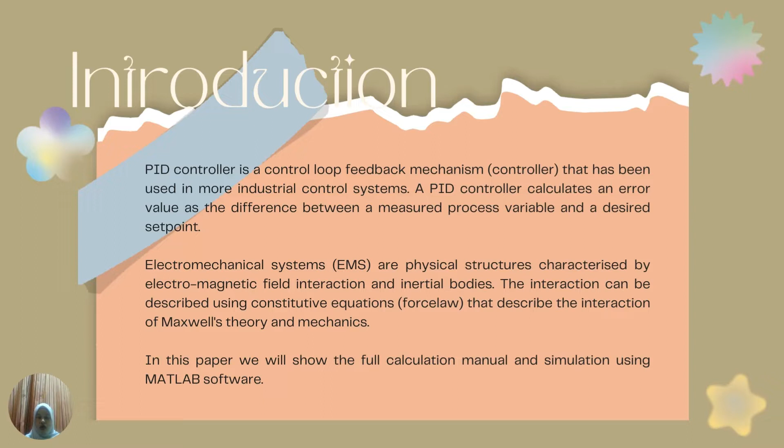Now I will be presenting the literature review part of this project. So in this chapter, we will focus on conducting a literature review for each project element. So based on the findings during the project completion, each element will be discussed in detail.

So firstly, an electromechanical system such as a DC motor gives greater speed control performance and a huge speed control range. A DC motor essentially consists of three components: a stator, rotor, and a commutator. A wide range of speed control is essential for robotic and actuation applications. The basic property of a DC motor is that the speed of a DC motor can be changed by adjusting the terminal voltage. DC motors are widely used as they are inexpensive and simple, and are used extensively in research, industry and laboratory activities.

Next is PID characteristics. So there are three approaches to dealing with the error. First is to use the proportional term to handle the present. Second is using the integral term to recover from the past. And the third one is using the derivative term to forecast the future. To control the DC motor speed in this paper, we will utilize a basic open loop system and a closed loop system with a PID system.

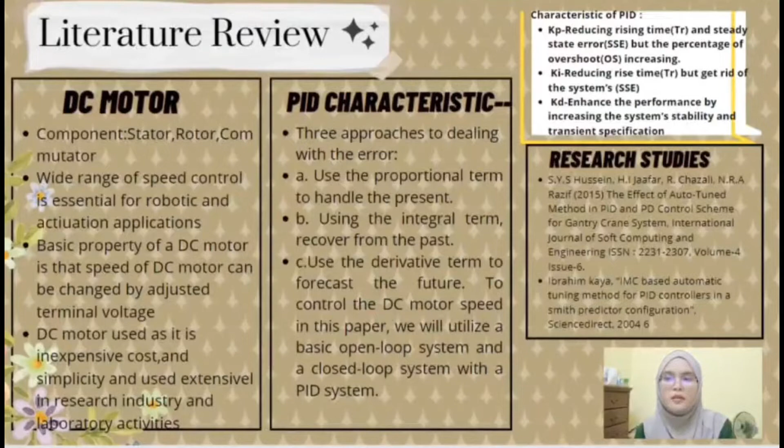So there are three characteristics of PID, which are Kp, Ki, and Kd. So what is the function of Kp? Kp will be used to reduce the rise time and the steady state error, but the percentage of overshoot will increase. Next, Ki will reduce the rise time but get rid of the system steady state error. And the last one is Kd. It will enhance the performance by increasing the system stability and the transient specification. And this is part of the research study that we have found in order to do a literature review in this project.

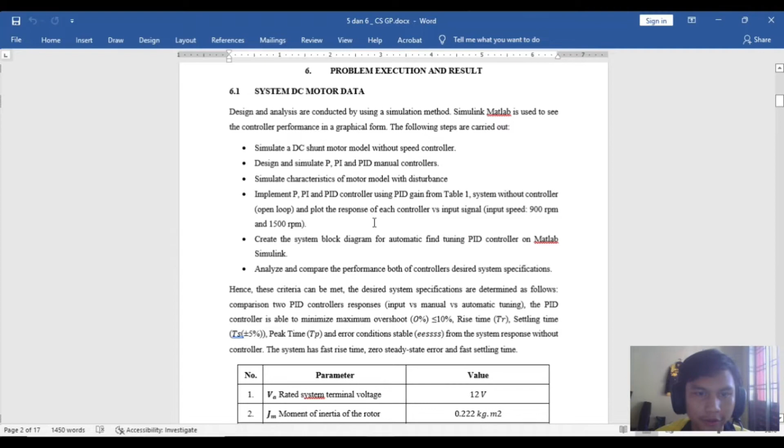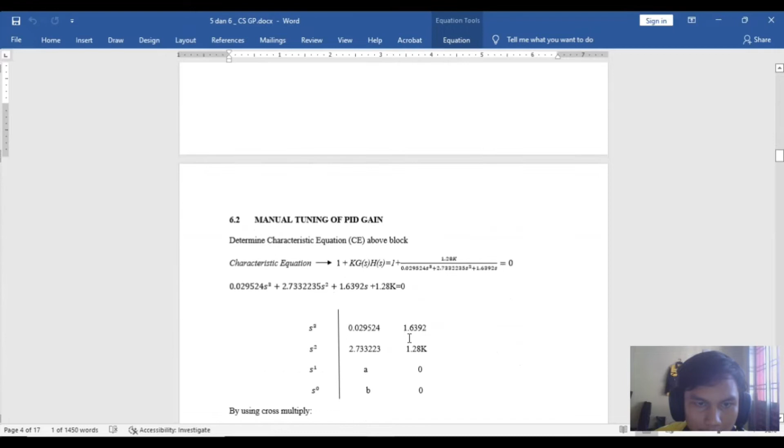So I will present the problem execution and the result. So from this data parameter, we get the transfer function with this value. So the main thing I want to do is the manual tuning of the PID gain. So for the manual PID gain, I will skip all the calculation and go to the result.

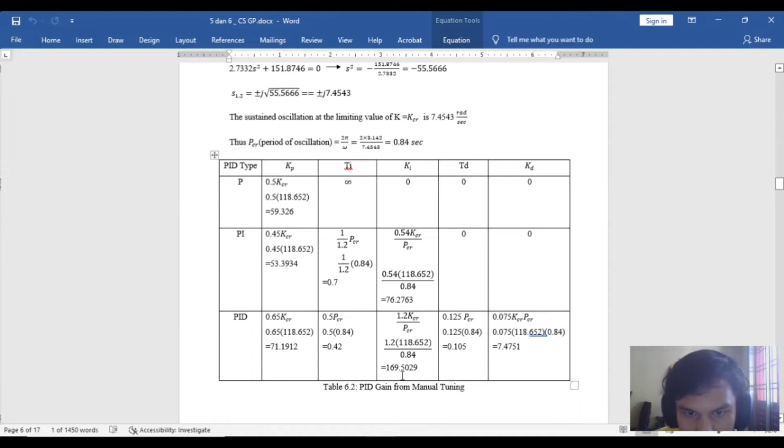For the PID gains, for P, gain P is 59.326, and for PI, gain P is 53.3934 and gain I is 76.2763, and for PID, gain P is 71.1912, gain I is 169.5029, and gain D is 7.4751.

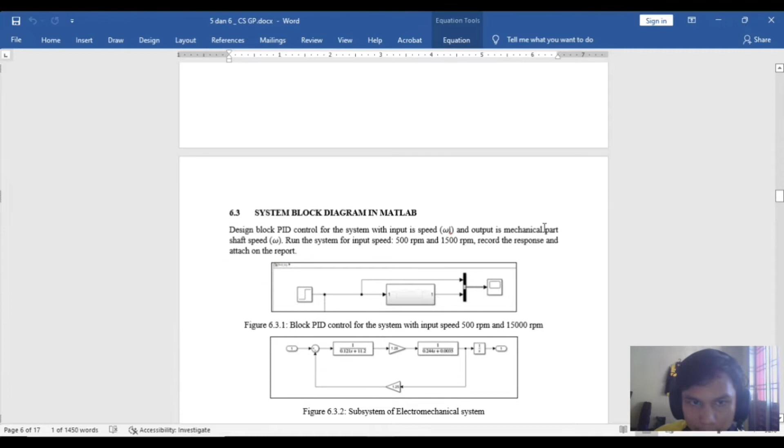So I will do the simulation using MATLAB. So we are going to do this block diagram, or we are going to open MATLAB.

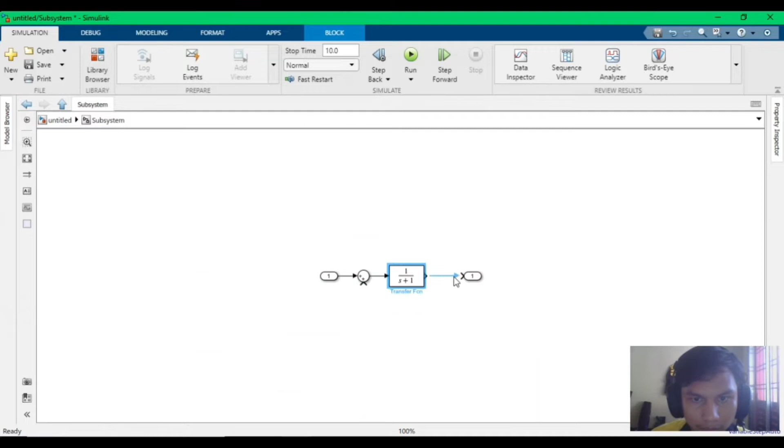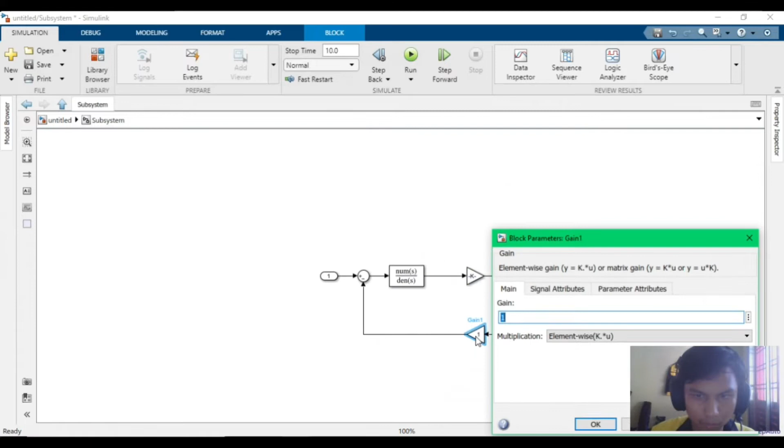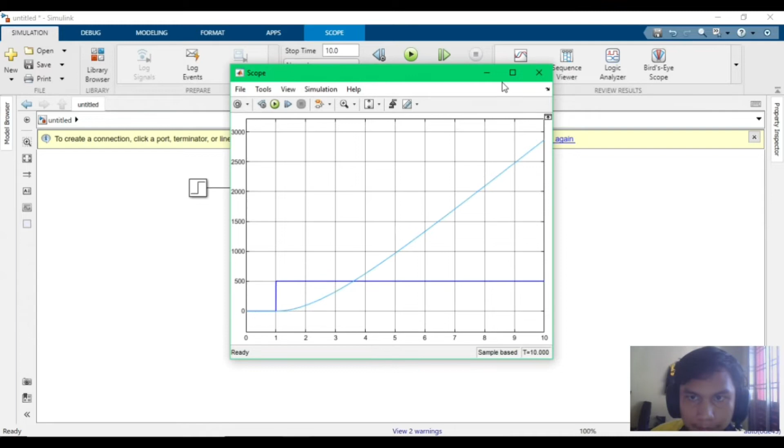So the first step is to run 500 RPM. So this is our response for the 500 RPM. And then for the 1500, we get this response for the graph.

And then for the next step, we're gonna create the system for the P controller. So for the P controller, we use this gain for the P gain.

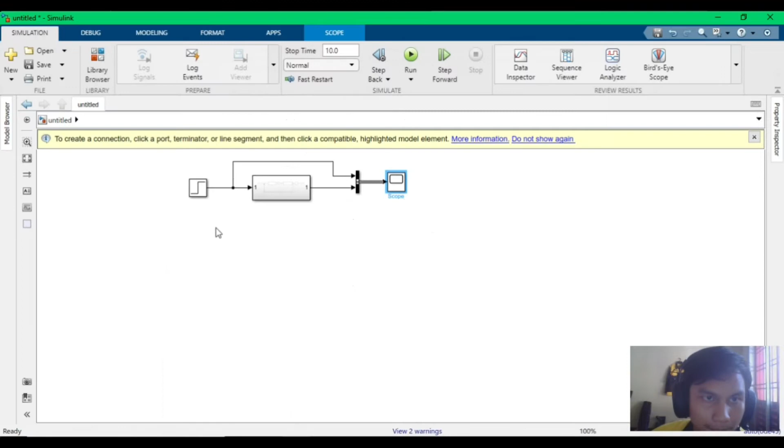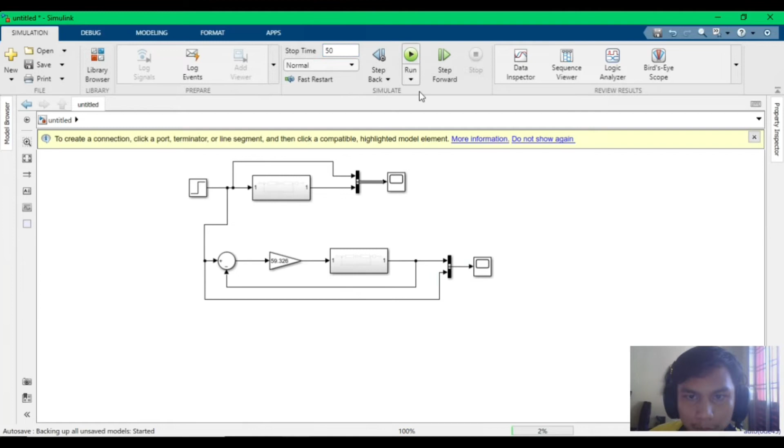Controller here for the 1500 RPM. This is our response, and then what we need to see is 900 RPM. So this is our response for the 900 RPM.

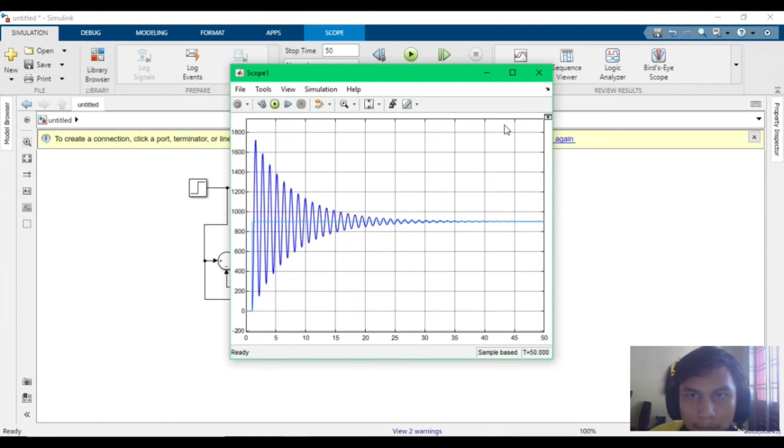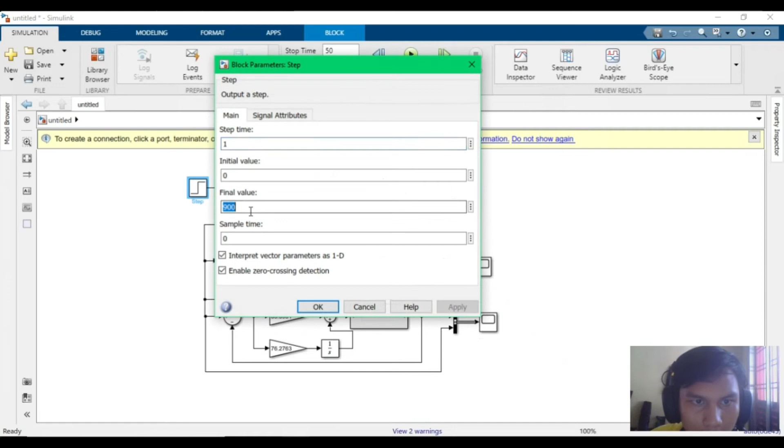So after that we are gonna do the PI controller. We're gonna run for the 900 RPM. So we get here the response for the 900 RPM, and then we need to see the 1500 RPM. These are the responses for 1500 RPM.

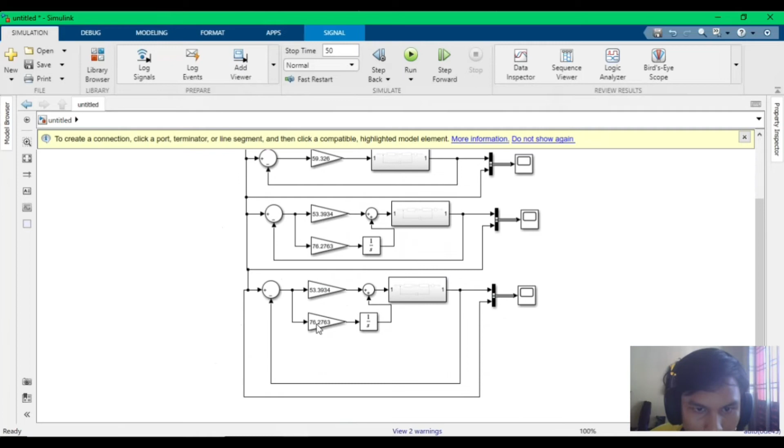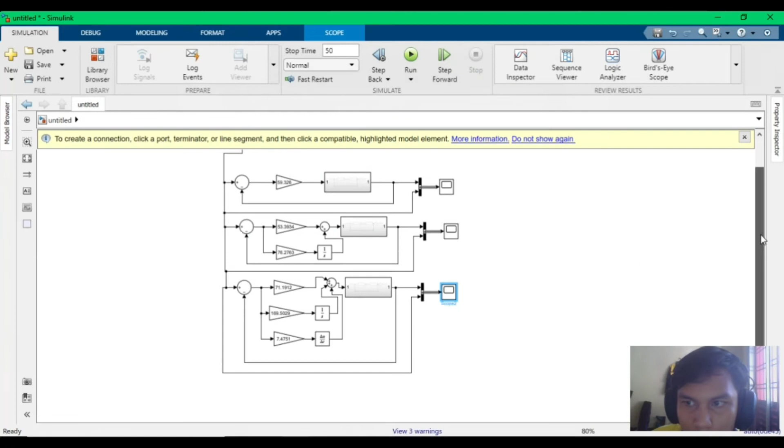So after that we're gonna do the PID control manual. Run it. So this is a response for the 900 RPM for the PID controller. So then you see the 1500. It's so similar to that. So it's the response for 1500 RPM.

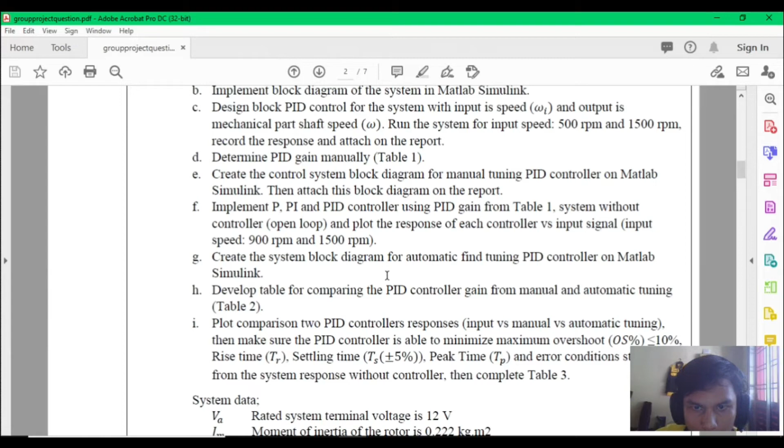So after we design the P, PI and PID controller, and the system without controller for the open loop, we're gonna do the auto tuning. So for auto tuning we open it, and we are gonna tune it.

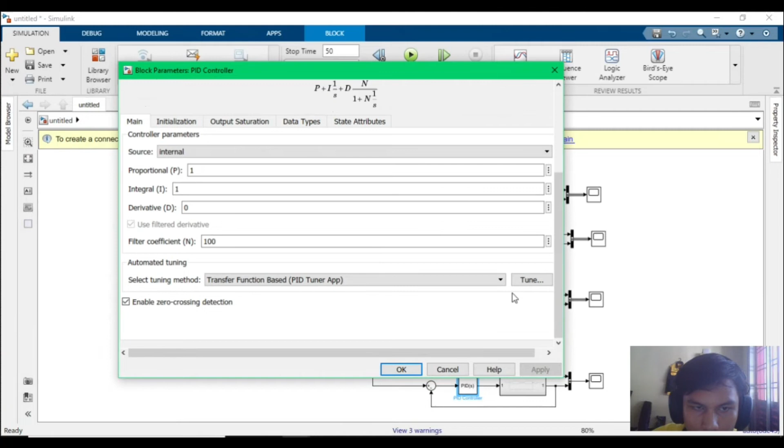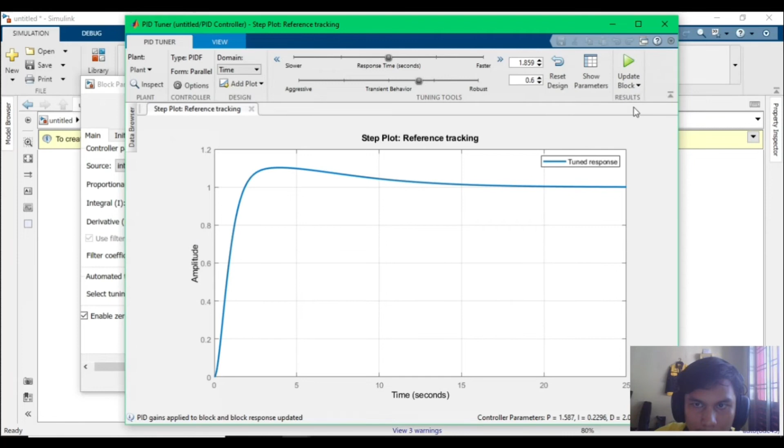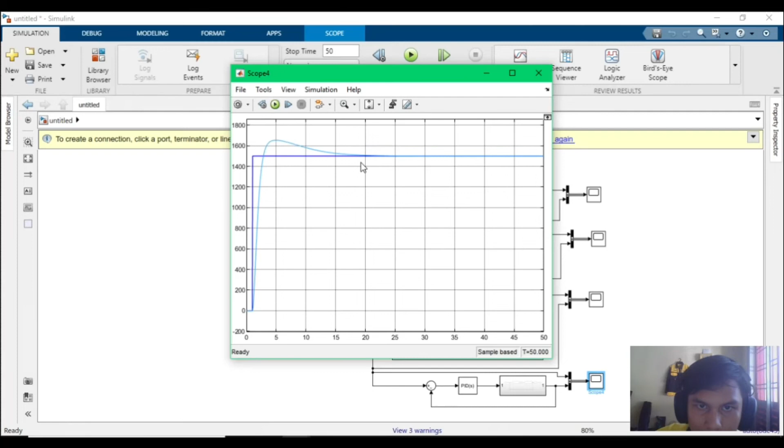So we update the block. We run it. So we get this graph. So this is our stabilized signal here.

And then we're gonna compare between the manual and the automatic. So we take a scope and a bus. So now we run it. So this is our comparison. The yellow is for the manual and the green is for the automatic. So we can see that the manual stabilizes faster than the automatic here.

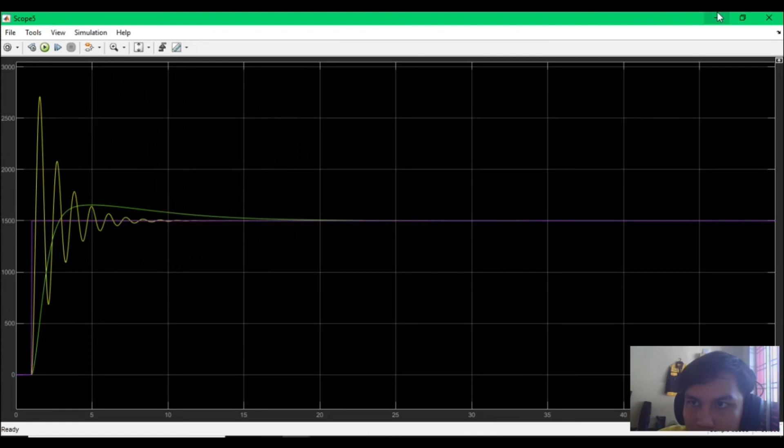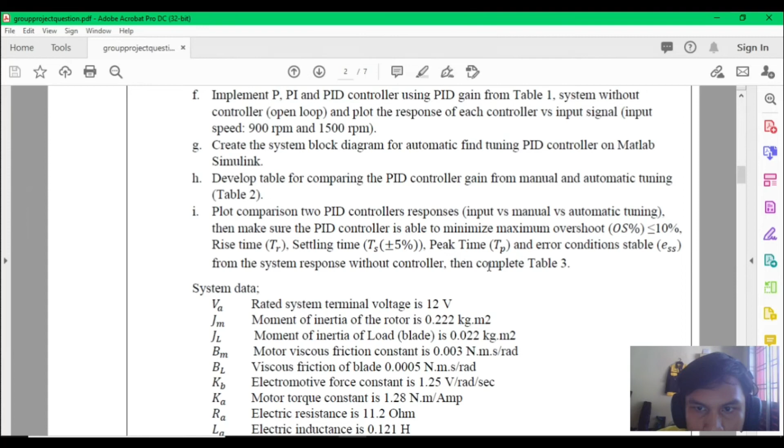So then what we need to do is a comparison of the PID control response, improved by tuning, and then the error and peak time. So to compare the PID manual and the automatic, we're gonna get the PID controller. This PID we're gonna change with the manual calculation.

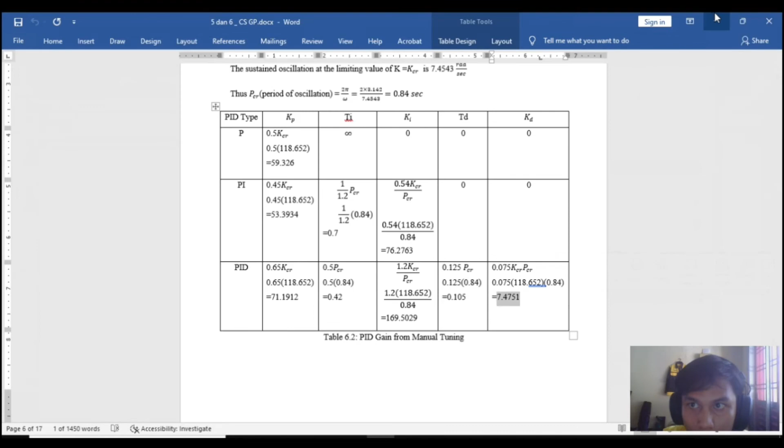So the gain 0.1, and then this gain, this 100. So we're gonna apply it and then tune it.

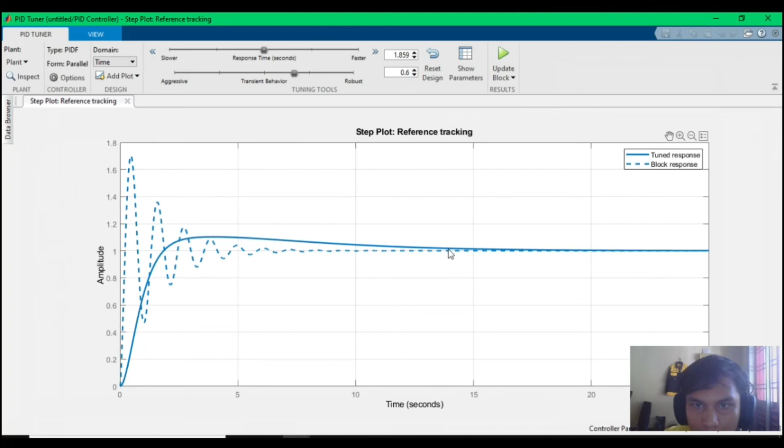So this dotted line is for the manual calculation and the line is for the automatic controller for PID. We also show the parameters, so you can see the rise time and settling time here, and overshoot, peak, gain margin and phase margin, and also the closed loop stability. So both of them are stable because of the PID system.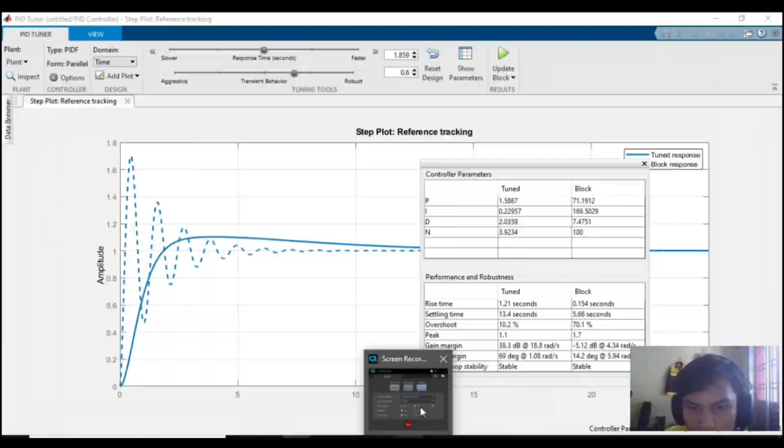AE190073. To conclude our project, we found that the PID control system for controlling speed is widely used in the electromechanical system industry. One of the major examples is a DC motor. We succeeded in simulating the given block diagram and calculating the PID gains manually from given values. From the calculated values, we succeeded in creating our own block diagram and simulating the manual tuning PID, which is the closed loop, the system without control, which is the open loop, and automatic tuning PID control.

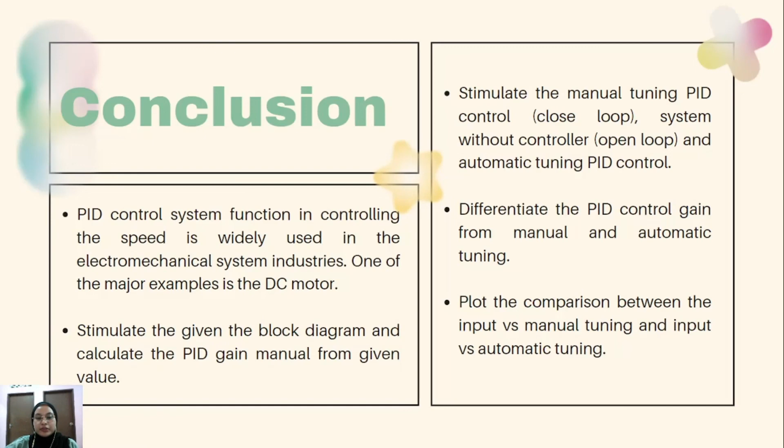We also can differentiate the PID control gains from manual and automatic tuning, where we found that the automatic tuning is much more stable than the manual tuning. Lastly, we can plot the comparison between the input versus manual tuning and input versus automatic tuning.